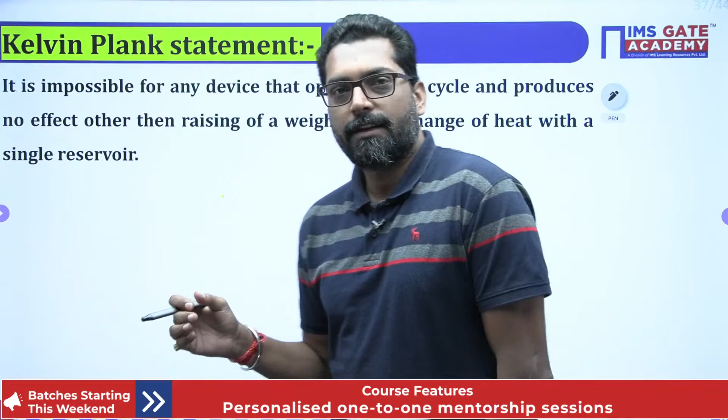Today we will discuss continuity of the second law of thermodynamics. We already studied the physical significance of the second law of thermodynamics, that it gives a qualitative parameter, not a quantitative one. It tells whether the process is feasible or not, whether the process is actually happening. If heat transfers into work or work transfers into heat, that means the process is happening.

That's why this diagram is very important. When the first law is switched on, the process is happening. But whether that process will actually occur or not, that is given by the second law.

This is very important. The conservation of energy says that energy will transfer, work is transferred into heat, heat is transferred into work. It is not necessary that it happens fully or partially, but it will transfer. When this transfer occurs during the process, that means the process is happening. But whether the actual process is happening or not, that deals with the second law of thermodynamics.

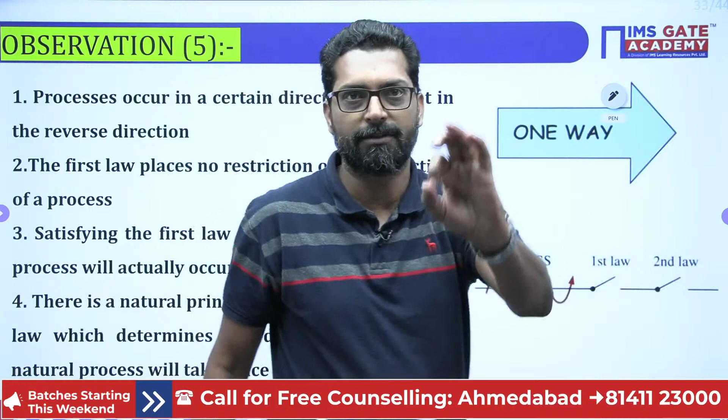This discussion is already covered. Heat engine already covered, thermal energy reservoir already covered, and its physical consequence. Now we will consider the two statements of thermodynamics.

The first is the Kelvin-Planck statement. This is very important, because first we read it as it is. What the Kelvin statement says, we take as it is. It uses somewhat advanced language to describe what is possible and what is impossible. It says that we cannot do something like that, meaning it is impossible.

As engineers, we want the possible. It says we cannot construct a device, meaning it is impossible for any device that operates on a cycle. If you want a device to continuously operate, it must have a cycle.

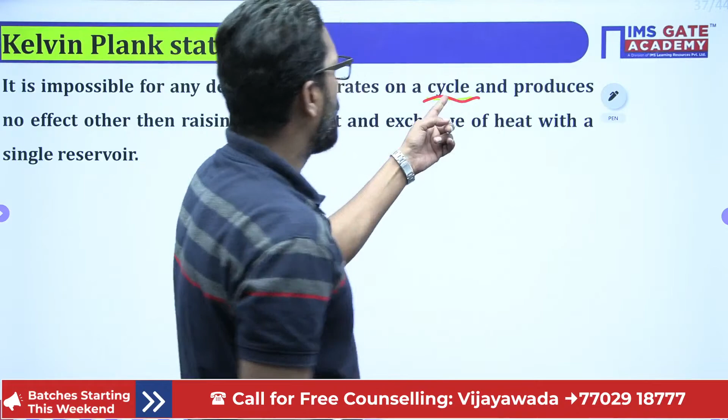We are not talking about operating on a process; we are talking about operating on a cycle. If there is any engine or device that continuously operates, it must be operating on a cycle. If you want to construct such a cycle, that cycle is impossible under a certain condition: the condition is that it produces no effect other than the raising of a weight, that means work, while exchanging heat with a single reservoir.

That means you cannot construct a device which takes heat and converts it totally into work without rejecting any energy, without loss of any energy, to another reservoir. This statement says that if you construct such a device, it must have a minimum of two thermal reservoirs.

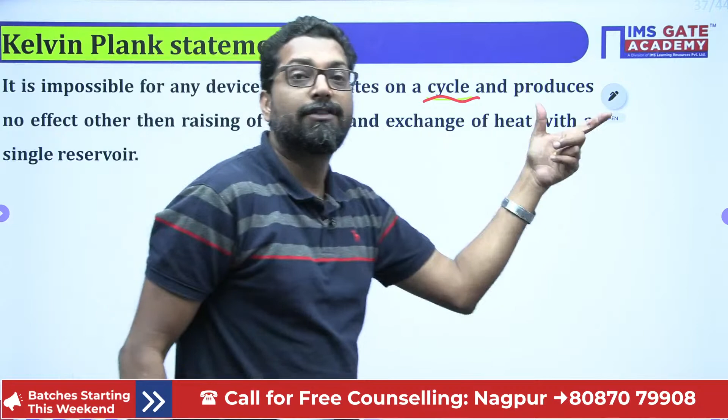That gives information about the number of reservoirs needed to operate a device on a cycle. So what is impossible? It is impossible to design a device operating on a cycle, with no effect other than producing net work, by taking heat from a reservoir. It says this is not possible, it is impossible.

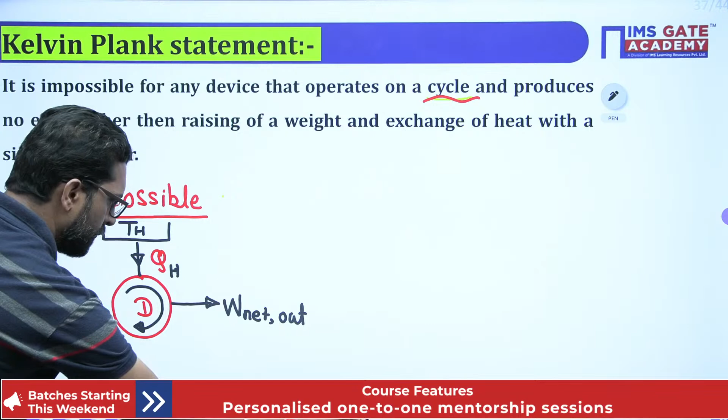If there is a rejection, if you draw that dotted line, no problem. That means if QL, the heat rejected, is zero, it is impossible. If QL is zero, you cannot construct such a cycle or device. It says it is impossible to convert total heat into work. It is not possible to convert all heat into work; it is possible only if you lose something. That is what is possible.

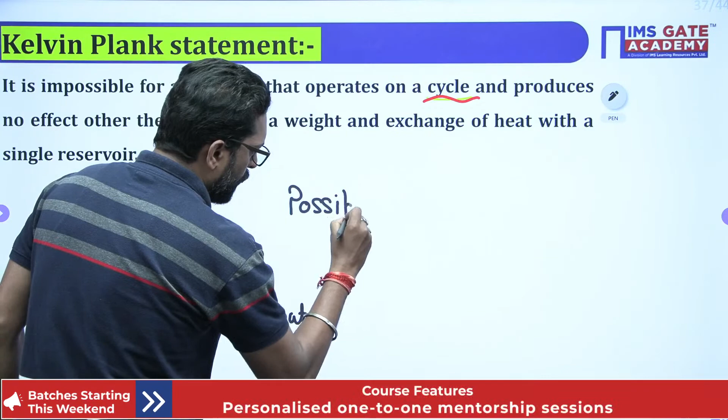What is the possibility? The possibility is that you construct a device which is operating on a cycle, which produces a net work by taking heat from a large thermal reservoir, and the remaining energy will dump into a low thermal reservoir. That will be possible. That means if you design this, it is called a heat engine. That means the Kelvin-Planck statement gives the information of the heat engine, a work producing device.

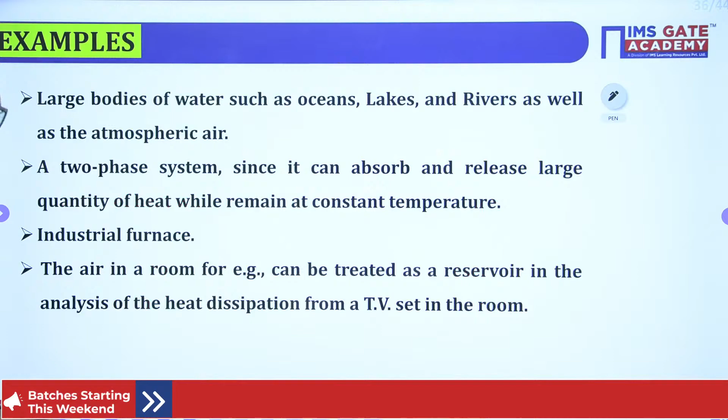This gives the work producing device. Yes Atul, that was already covered in the previous lecture, but I will cover it again in the starting of the class since it is a general statement. What is the general statement? This is very important, Atul. Okay, no problem, I am happy to revise again. See my dear, the general statement is of the second law.

It gives that all the spontaneous process, what is meant by spontaneous? Natural process. All the spontaneous processes have a certain rhythm, that means a certain direction. That means the second law gives the directional constraint.

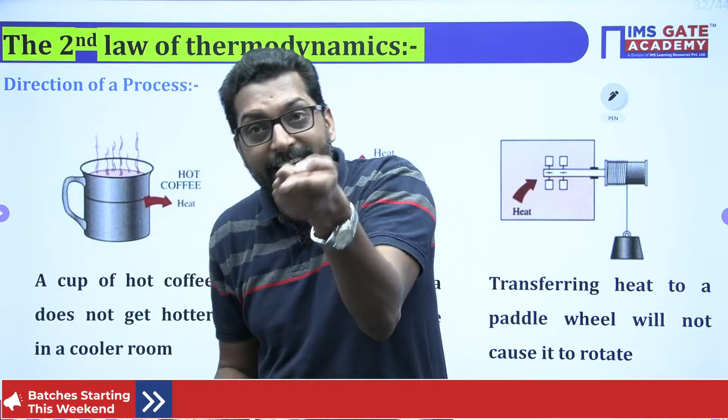That means there are infinite number of processes, many processes to go from one point to another point. But out of that, according to the second law, only one process is feasible, or helpful for me, or efficient, and that will be predicted by the second law. That means out of all the processes, there is one process which is more efficient, that we will follow. That gives the direction of the process to be followed.

This is the very simple example so you can understand, but there may be other examples which you cannot directly predict. So you can predict using the property known as entropy. So if you want to find the directional feasibility or not, that will be predicted by the property known as entropy.

So with the help of entropy, we can say whether the process is possible or not. So your question was what is the general statement? The general statement is that this gives the directional constraint, it gives the direction. Yes, energy will conserve, energy will convert from one form to another, but which conversion is efficient, that is given by the second law. Okay, I hope it is clear. Now next.

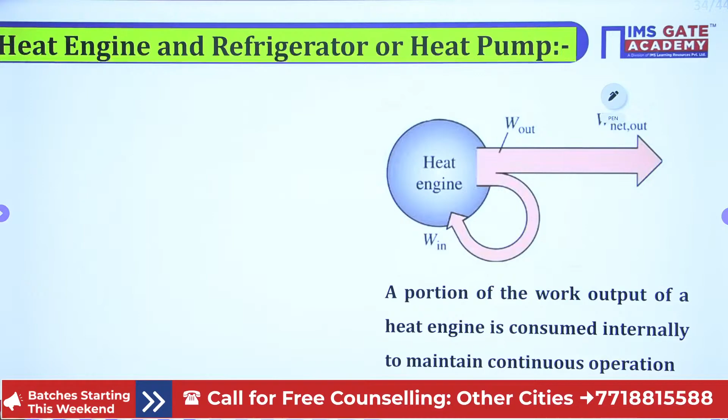So this is the efficiency. Now if you find the efficiency of this heat engine, we know that it is 1 minus QL by QH, already defined. This is the efficiency of the heat engine, and this equation holds for any process, mind it. It is not necessary that this is reversible or irreversible, this equation is applicable for any process.

Okay, so this is the efficiency of heat engine. This precisely states the Kelvin-Planck statement. Now the second statement, what is the other thing in that? So these are the Kelvin-Planck statement, and now sometimes I will give you some extra information for that. This is called, in this case, it is possible.

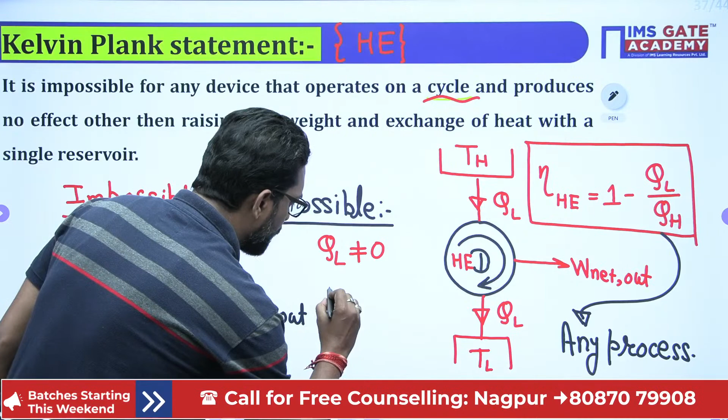What is possible? That means QL is not 0, QL must have some value. If QL must have some value, then efficiency of the heat engine will be less than 100%. Is it true? Less than 100%. Yes, if this is happening, then this will be a quantity which is a fraction. That means QL by QH is always less than 1, yes or not? QL by QH is less than 1, so this is also less than 1, so efficiency of heat engine will be less than 100%.

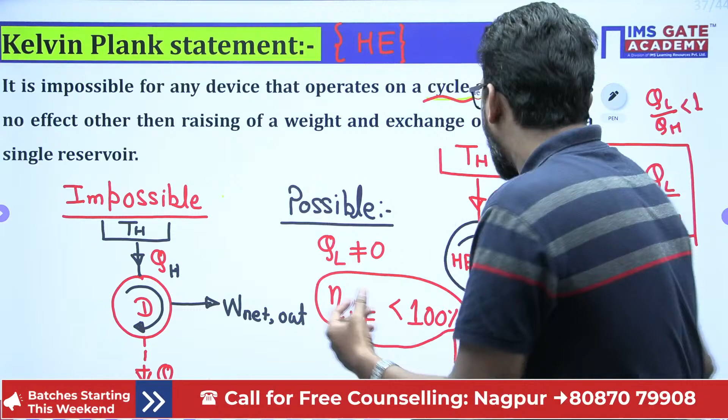Okay, less than 100%. Now if we operate a power plant, this heat engine is a work producing device, and this will also be modeled as a power plant. So in the power plant, there are two temperature limits: one is the source, and this is called the sink. Source is the furnace and sink is the environment. I will write it down here, no problem. Why? Because it gives the feel. So if you think about the heat engine, let's suppose this is our heat engine.

Okay, operating on a cycle. What cycle? We don't know. Operating on a cycle, and we take this, this is our system. Heat engine is our system. This is our system, mind it. Now it will take a heat

from a high temperature reservoir QH, produce a net output, produce a net work, and dump the remaining energy to the low temperature reservoir TL. Mind it beta, this is TH.

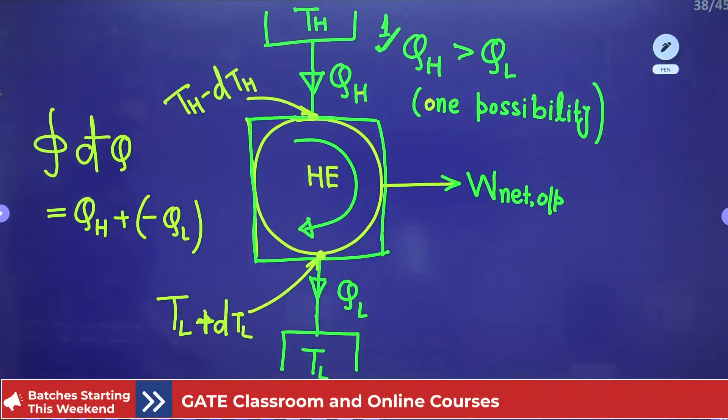My dear, each and every line has an importance. Okay, that means this one possibility is greater than 0. That means cyclic integration of dq is greater than 0 for a work producing device. It is clear. And what is happening, another thing we'll discuss, but right now this is clear. Cyclic integration of dq is greater than 0 for work producing device, work producing device.

Now, what we know is first law of thermodynamics, cyclic integration of dq is equal to cyclic integration of dw. We know that, that means dq is greater than 0, this is also greater than 0, yes this is also greater than 0. That means QH minus QL is equal to W net. This is according to first law of thermodynamics.

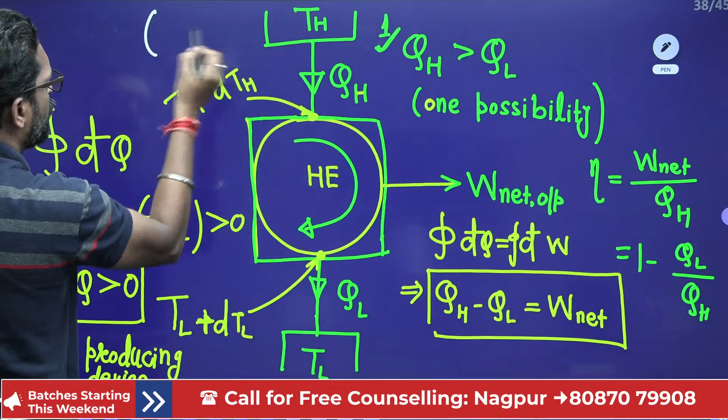Right, if we think about the power plant, this high temperature reservoir, my dear, this high temperature reservoir is called, this is your source. This is source temperature, and in the source temperature, if you think about the power plant, that means steam turbine, Rankine cycle we'll discuss later on, this is furnace. This portion is furnace, and this is QL. This is your sink, and this will act as an environment, a surrounding, right? Environment, okay? So this precisely we will use the concept of power plant in the power plant, okay?

When we enter into the entropy chapter or your Carnot cycle, we will discuss now today's Carnot cycle. Then we define the cycle is reversible, and with the reversible, internally, externally, all the things we will discuss, no problem. So this is the things, okay? This is clear.

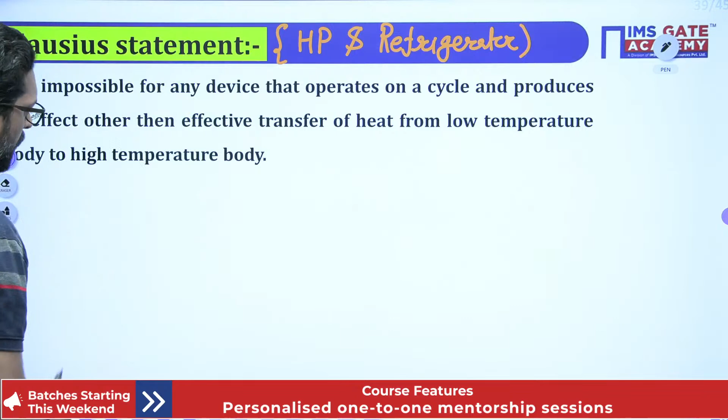Now, Clausius statement. What is the Clausius statement, my dear? Clausius statement gives that, what is that? It gives the information about heat pump and refrigerator. It gives the concept of heat pump and refrigerator. What does it say? See beta, I give you one thing. What is that? See, if you want, this is a high temperature thermal reservoir.

See, first see the motivation. This is a low temperature thermal reservoir. Okay. Now, if you connect with the diathermic wall, heat must flow from high temperature reservoir to low temperature reservoir. There is no problem, that means this is a spontaneous process. It will be there, that is called a spontaneous process. That means if you attach this high temperature and this low temperature and attach a metallic wall, you can say that the heat will flow. So this is a spontaneous process, a natural process.

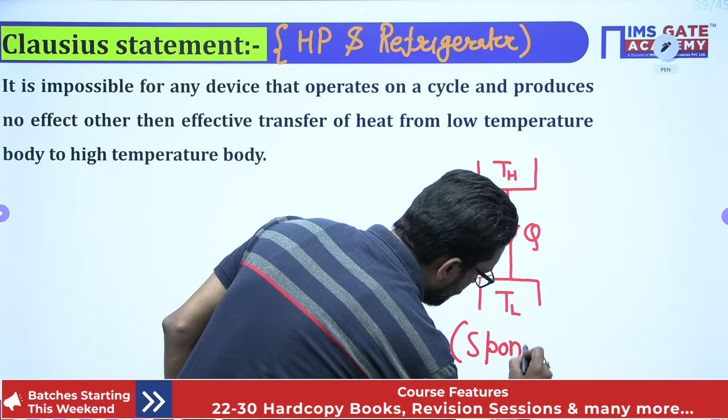Spontaneous process: it will occur. Now, Clausius thought about what happens if we take the same thermal energy reservoirs, TL and TH, and we want heat to transfer from low temperature to high temperature. Not possible.

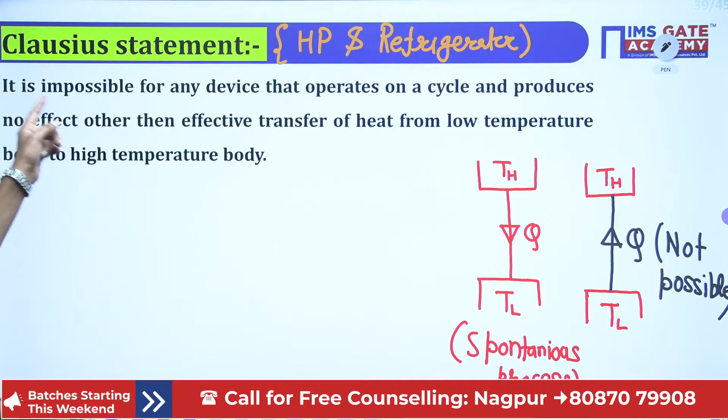This gives the Clausius statement: it is impossible for any device that operates on a cycle and produces no effect other than the transfer of heat from a low temperature body to a high temperature body. It is impossible.

That means if you want to transfer heat from a low temperature reservoir to a high temperature reservoir continuously in a cycle, you must have an external agency. Without external agency, you cannot achieve it. Same thing with water: if you take water from a low reservoir to a high reservoir, you must have a pump. Without pumping, without external work, you cannot transfer water from low reservoir to high reservoir.

Here it is pumping of heat, and in that case pumping of water. We want the heat to flow, and at that point we want the water to flow. So if water flows from low reservoir to high reservoir, it is not a spontaneous process. There must be some external agency known as a pump. Same in the case of heat flowing from a low reservoir to a high thermal reservoir, there must be an external agency. So what we will do is construct a device.

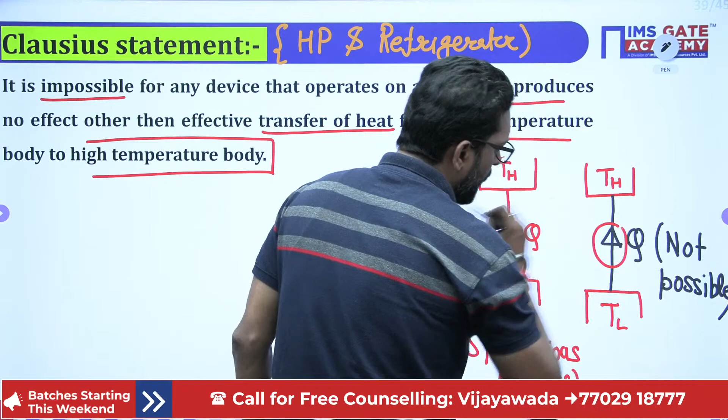Here, we construct a device which operates on a cycle. So this is impossible. What is possible?

What is possible is that if this is your low temperature reservoir and this is your high temperature reservoir, and you want to transfer heat from the low temperature reservoir to the high temperature reservoir, you construct a device operating in a cycle in which we have to give external energy. That means we have external work input. That will assure you it will transfer energy from the low reservoir to the high reservoir. This is your QL and this is your QH.

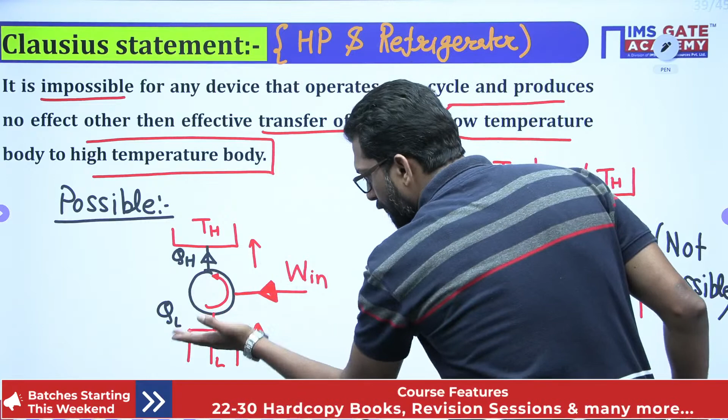That cycle is possible to pump the heat from a low reservoir to a high reservoir, continuously working. But the problem is that if we don't have this external work, if this is zero, it is impossible.

Now, if we want to maintain the lower temperature, in that sense this device is a refrigerator. If we want to maintain the high temperature, that is a heat pump. So what is the observation here?

If you maintain... that means work input device, refrigerator or heat pump. Work input in a cycle, okay?

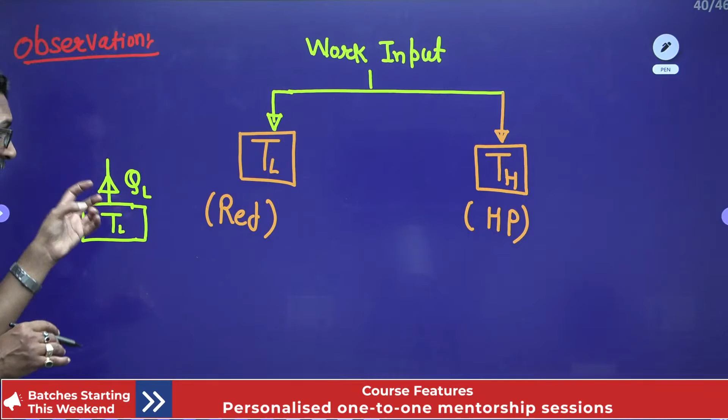That means you constantly extract the heat to maintain the low temperature reservoir; that is called the refrigeration effect.

And what is this one? Sometimes in layman's language we can say this is also what we want. So, this is a refrigeration effect, and this is a refrigerator.

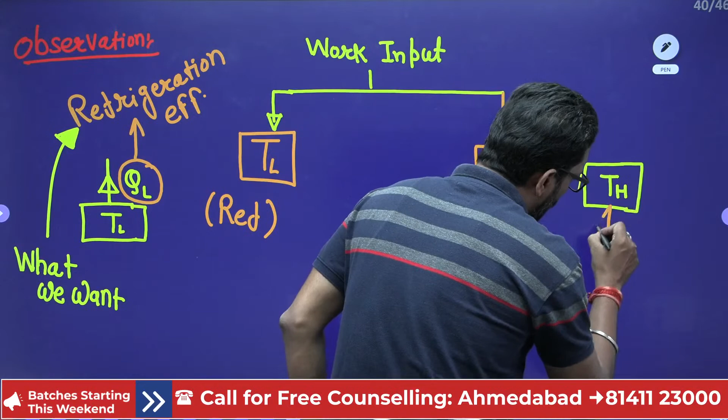If we maintain the high temperature, that means if this is your high temperature, and you maintain this one, continuously you give heat into this. If you maintain a high temperature, continuously you dump the heat into the high temperature reservoir. That is QL.

So this QL is a pumping effect. This is your refrigeration effect, and this is your pumping effect.

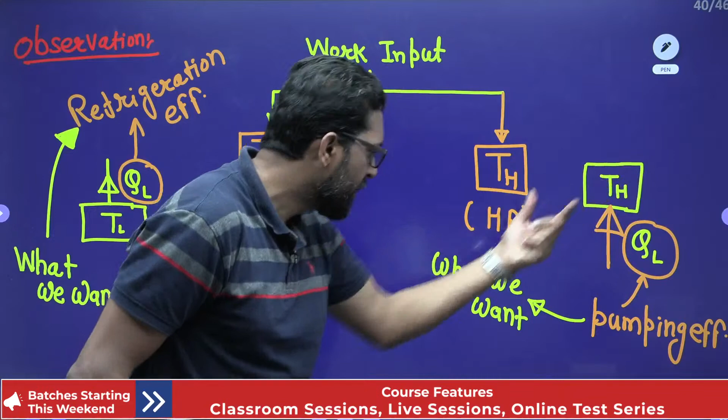Pumping effect. That pumping effect is also sometimes called what we want. So beta, in the work input device, there are two types: refrigeration and heat pump. In refrigeration, we want the low temperature, and in the heat pump, we want the high temperature to maintain. To maintain the high temperature, if you supply heat to the system, that is called pumping effect. If you maintain the low temperature, you continuously extract heat, that is called refrigeration effect. That means in both cases, we have to define coefficient of performance, COP.

We define the performance. What is the performance? There is a difference between efficiency and performance. Efficiency is net output by input. Performance is what we want and what we pay for it. This is very important. So performance is what we want, divided by what we pay for it.

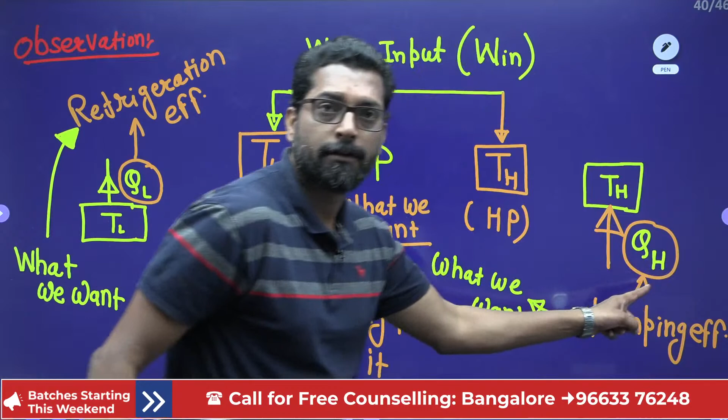What we want, beta? In the case of refrigeration effect, what we want is QL, and what we pay for it is work in. In the heat pump, what we want is QH, not QL, and what we pay for it is W in. So accordingly, you can define the coefficient of performance.

We already covered this thing. This is your Clausius observation, observed by Clausius. My dear, this is a spontaneous process. You cannot reverse it back spontaneously without installation of a device which extracts energy from an external source. That will be a second law. That means the second law says it is not possible. This is possible naturally, there is no science against it naturally. But if you want the direction reversed, whether it is possible or not, that gives the second law. That means this gives the direction in which it is possible.

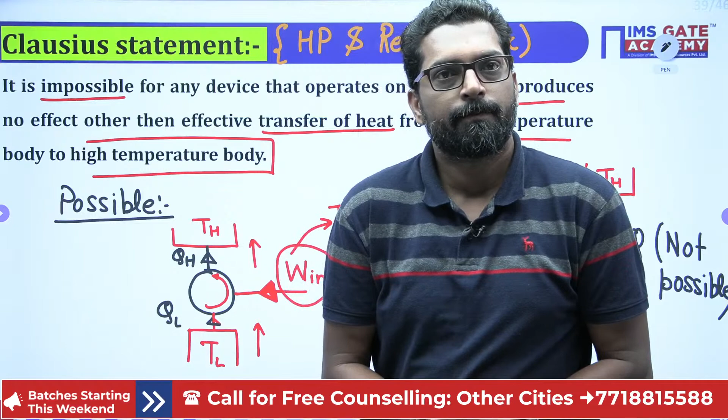So we have to design two devices: one is power producing, the other is power absorbing. According to the Clausius statement, we design the power absorbing device, that means power input cycle, and for the Kelvin-Planck statement, we design the power output cycle. So there are two types of cycle: power output cycle and power input cycle. Power output cycle known as heat engine, power input cycle known as refrigeration or heat pump.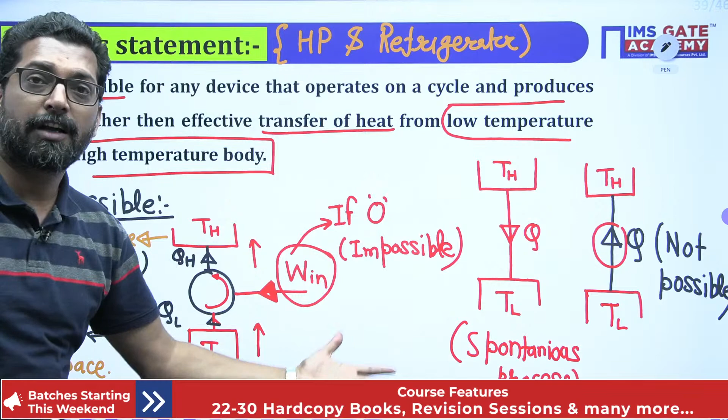And this is called sink, low temperature, and that is sometimes called cold space. So the terminology is very clear. Why? Because we study the importance of this to implement this concept into a power plant. That is very important. So these terms are very important: warm environment, cold space, environment, furnace, like that. Furnace acts as a source in the case of heat engine. Warm environment acts as a source in the case of refrigerator or heat pump.

Okay, now if we apply the cyclic integration, this is very important. See, if we apply the cyclic integration of dq for the power producing device, there must be greater than 0. This is very important, I am telling you. But if we installed a refrigerator or heat pump, what is delta Q? See this, my dear.

That means if you design a device, not red color, what is this? This is okay, device. Let's suppose this is a refrigerator or heat pump, operating on a cycle, and let's suppose this is our system. This system will continuously work on a cycle. The Clausius statement says the possibility is that when you take energy, we are able to extract heat from a low energy reservoir and dump the remaining energy to the high thermal reservoir. That is okay.

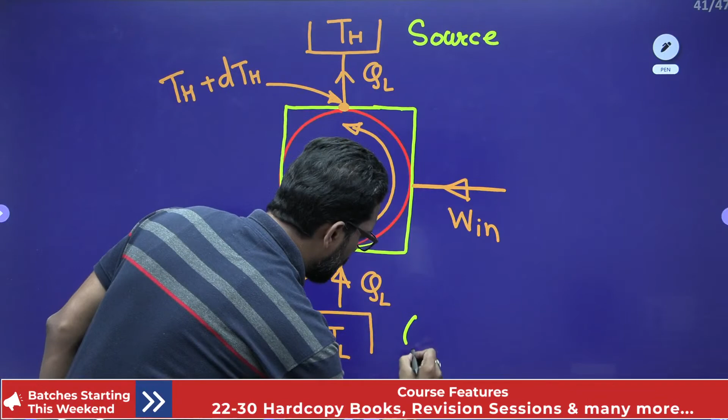Now, this is very important. This is called source, high temperature always called source. This is low temperature always called sink. So in the power producing case, what is sink called? Right now sink is called warm environment. Source is called cold space. Sorry, my dear, this is called cold space.

Cold space, and this is called warm environment. Now, from low temperature, this is not direct heat transfer.

What is that? What is Atul saying? Yes, this is QH. Now what is your question? I don't understand - one second. Atul says that this is not direct heat transfer. Which one, Atul? Just this one, I think. You're telling this one, please?

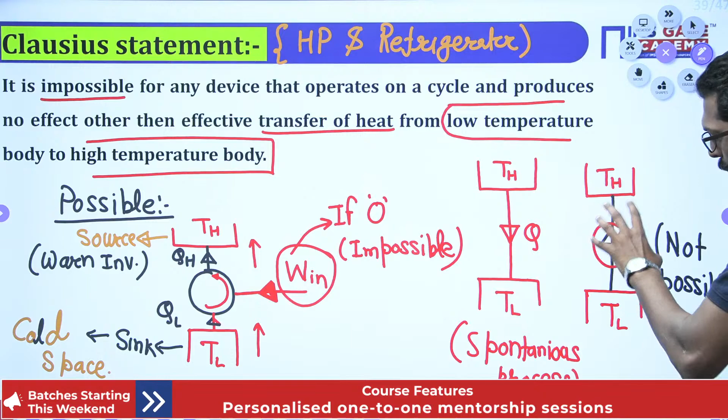Yes. From low temperature reservoir to high temperature, we cannot directly transfer heat. We have to install a cycle. Very important - you cannot. We have to install a device. Which type of device? A power absorbing device, like that.

See, produce no effect other than the effective transfer of heat from low temperature to high temperature. That means if any effect is taken from the outside to pump the heat from lower temperature to high temperature, it is not possible.

So what is possible? You construct a device - okay, I think you are asking like that. I think is there any confusion in this context? Other things you want to ask, please reply in the chat box. Okay, it is clear, then okay, otherwise you can ask me. Repeatedly, no problem.

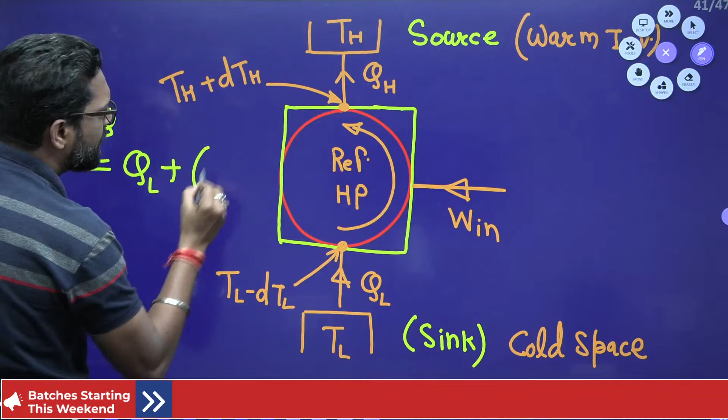No problem. So this is our refrigerator source and this is our work absorbing device. Now if you find the cyclic integration, what is the cycle integration of dq in this case? The cycle integration, we know that this is QL positive plus - why? Because this is summation - minus, it is out from this system, minus QH.

See the beauty. It is one possibility that QH is always greater than QL, yes or not? So QH always greater than QL, that means the possibility is that this may be less than 0. Very important - this may be less than 0. Other equality or inequality will also hold, but that inequality we will search in the next session.

Okay, next class, what we will do then - accordingly the cycle is reversible or irreversible. So cyclic integration of dq is less than 0 for a work absorbing device. That means in the Kelvin-Planck statement, cyclic integration of dq is greater than 0. In the Clausius statement, cyclic integration of dq is less than 0. This is sure.

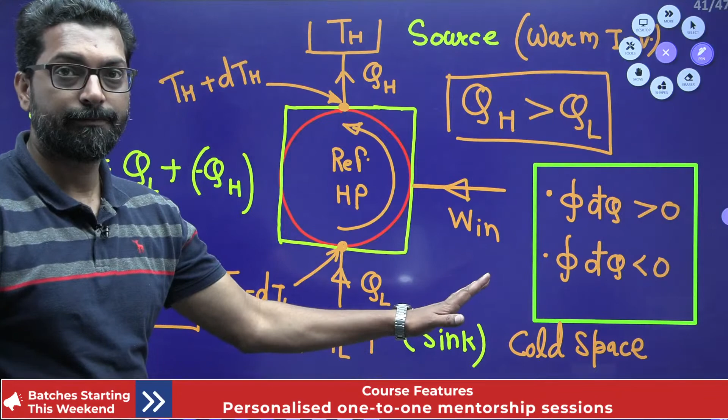This is sure, so we have to think like that. If you take one observation, what is that? Cyclic integration of dq is greater than 0, cyclic integration of dq is less than 0, cyclic integration of dq is greater than 0 - this greater than 0 is work producing. That means this is work producing, and this is your work input device. This is clear, okay, so this is very clear.

Why are we discussing this thing? Because in this manner you cannot teach anywhere - I am damn sure that in this manner you cannot teach anywhere in the sense of second law of thermodynamics. This gives the build up of the quantity dq by T, and that quantity is a very important quantity. Why? Because this quantity dq by T is related to the property, and what property we will discuss in the upcoming classes.

So be patient. So this is your work absorbing device - work absorbing device has cyclic integration of dq less than 0, work producing has cyclic integration of dq greater than 0. Okay, no problem at all. Now the next one is very important, very important. What is that? What is the context? Yes, this is very important, I'm telling you.

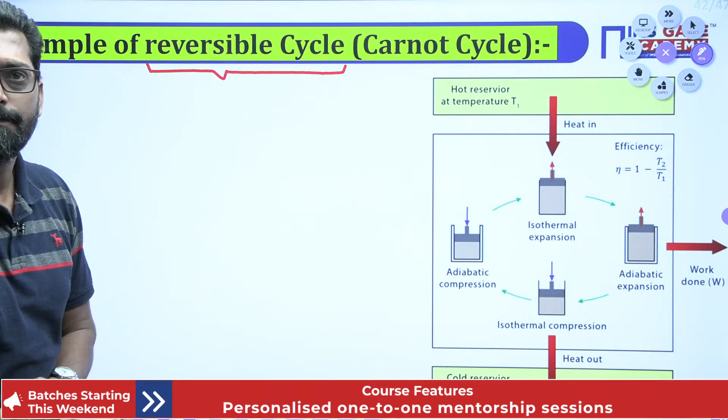See, from here, my dear, there is one punch - what is that? There is one term, reversible cycle. If we think about the reversible cycle, the first thing that comes into mind is, what is the criteria for the reversible cycle? Yes or not? What is the criteria for the reversible cycle? See, reversible - the word reversible, that means total reversible.

Total reversible of the system - what is the total reversible? We already discussed the total reversible is the combination of internal reversible plus external reversible, right?

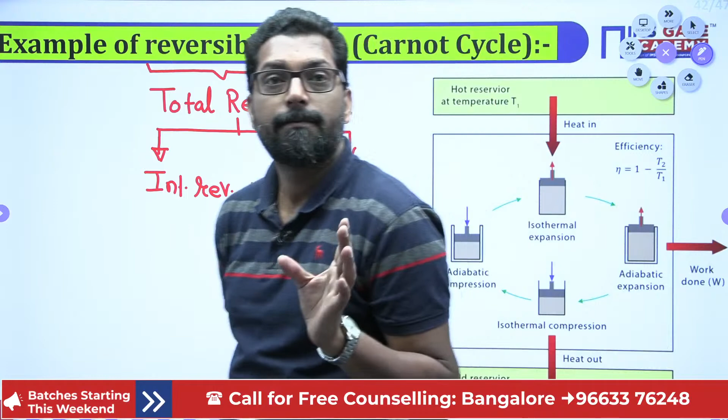Now the important thing is how to make the system internally reversible and how to make the system externally reversible. If you make the system internal reversible, this is very important - there must be a quasi-static process. Must be a quasi-static process.

That means you can say sir, there is no any dissipative effect. This is very important. That means there is no dissipative effect, meaning we cannot change the property in terms of temperature due to viscosity or friction. That means friction and viscosity are negligible.

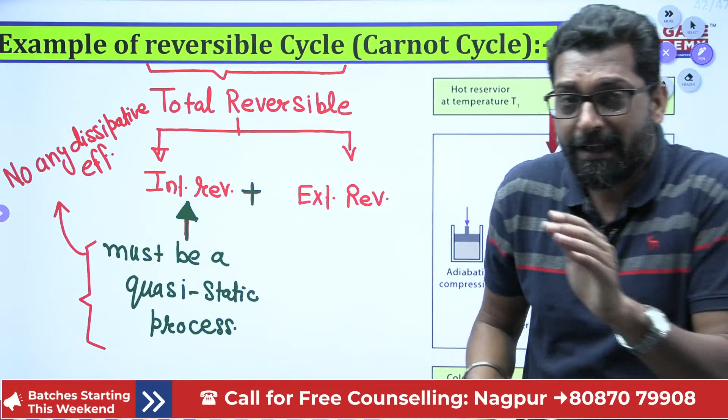See, internal reversible is due to the dissipative effect. This is very important - internal irreversibility. If you say internal irreversibility, that means if you want internal reversible, you disregard the dissipative effect. That means when the piston cylinder, if you assume the piston is moving inside the cylinder, you must have no friction between the cylinder wall and the piston.

We can consider there is no friction when the process is very slow. When the process is very slow, that means each and every point during the process has a locus. That is called no dissipative effect. So must be a quasi-static process.

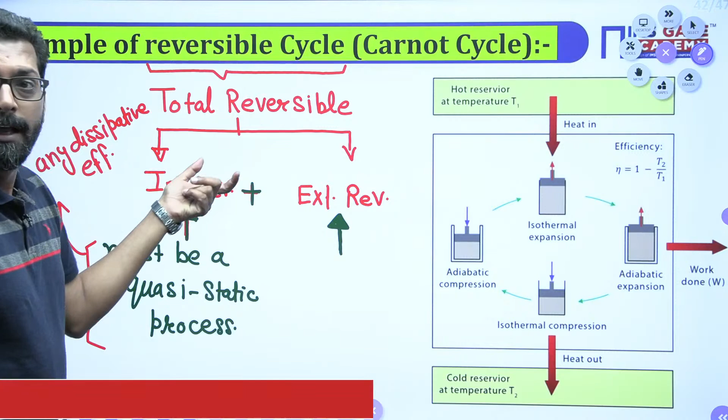Now what is the external reversible? This is very important - how to make external reversible? Internal is due to dissipation, you can say as dissipation; external as heat transfer.

So external reversible or irreversible, you check the heat transfer through which range of temperature. Internal reversible or irreversible, you check how much the process will have a dissipative effect - it is more dissipative or very minimum dissipative. If there is a very minimum dissipative effect, it may be modeled as internal reversible.

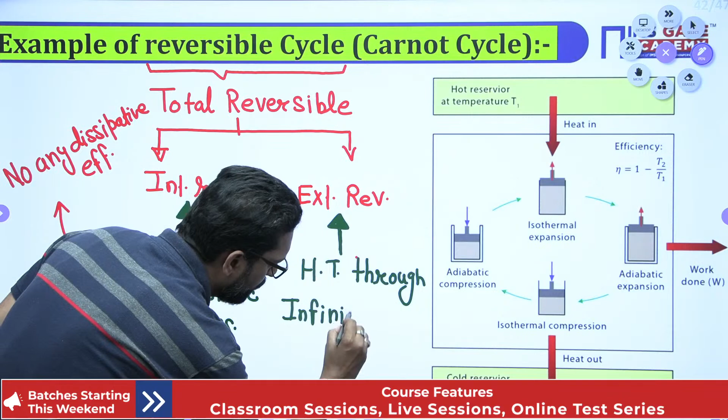That means externally reversible means heat transfer through an infinitely small temperature difference. That means in this sense, if you want external reversible, delta T tends to 0. This is very important - delta T tends to 0.

That means heat will transfer from the surrounding to the system. The temperature difference is very minimum. If you do like that, then you can say this is the external reversible. Number first. Now, if we want,

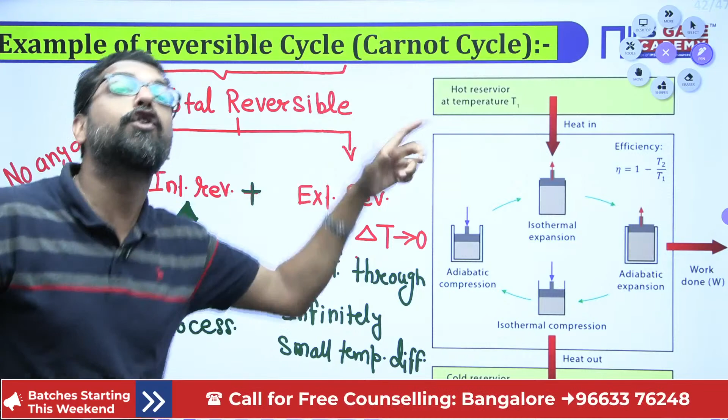so in the Carnot cycle, there is a cycle known as Carnot cycle. What is the major perspective of the Carnot cycle? It is total reversible - that means internally it is a quasi-static process, no dissipative effect, and also heat transfer across an infinitely small temperature difference. This is clear.

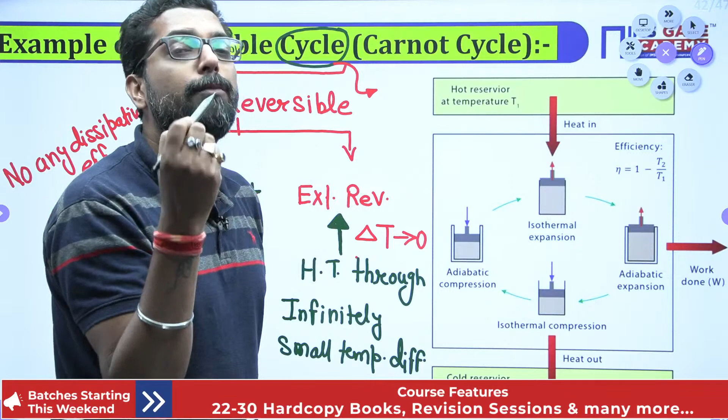Total reversible. Now, so there is a cycle, and this is your cycle. This cycle has many processes, more than 2 processes - minimum 2 process. So in the Carnot cycle, there are 4 processes. In the Carnot cycle, there is a 4 process. What is that? We'll discuss.

See, first there are 4 diagrams here. The first one, we discuss the first one. This is, first is the adiabatic compression. My dear, we'll start the process 1 to 2. This is very important, okay?

Process 1 to 2 - what is the process 1 to 2? There is a compression. What is that? Compression means you compress the gas in a closed system. This is the closed system, beta. Okay, you compress the gas, so for a closed system, there must be a piston cylinder arrangement. In that piston cylinder arrangement, there is a gas, a fluid, which has to be compressed, and the compression you want is adiabatic.

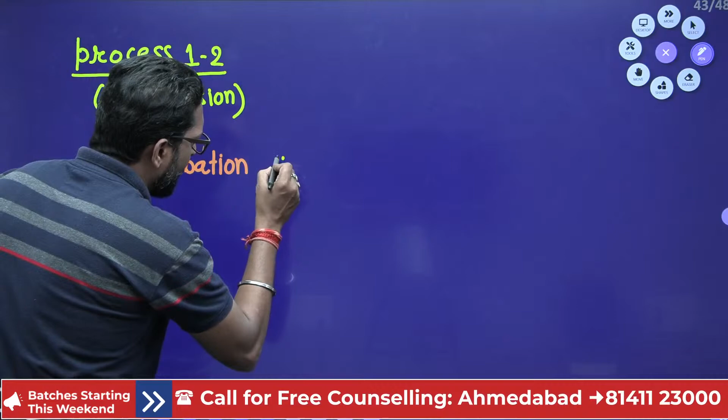That means heat transfer during process 1 to 2 is zero. This is the adiabatic process: 1 is the start of compression, 2 is the finish of compression. During this, there is an adiabatic compression, number one.

During compression or expansion, we say the cycle is reversible - totally reversible, internally and externally. That means you compress reversible adiabatic - reversible plus adiabatic. What is the nature of reversible plus adiabatic? This is a very important nature.

We'll discuss this in the next session.

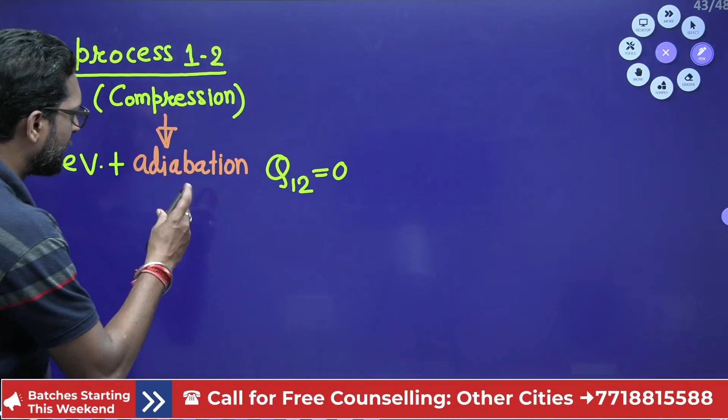But we know in the adiabatic case there must not be any chance of heat transfer. That means you have to design a cylinder such that - okay, this is our piston, and this is our system. Now you design a cylinder in such a way that it is completely insulated, meaning there is no chance of heat transfer.

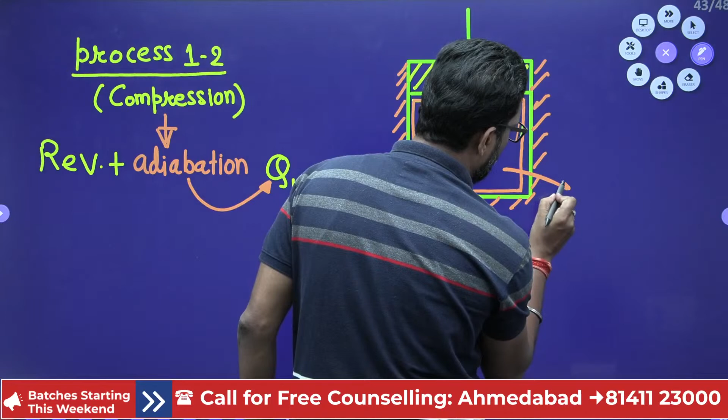Now you compress it. If you compress it, what happens? There is no transfer of heat, so heat transfer 1 to 2 is zero. That means if you compress it, its temperature will continuously increase.

So you compress from point 1 to point 2. That means you must have work input - a displacement of the boundary work. The piston wants to displace the system boundary. The piston acts as the surrounding, so from the surrounding, work is done on the system.

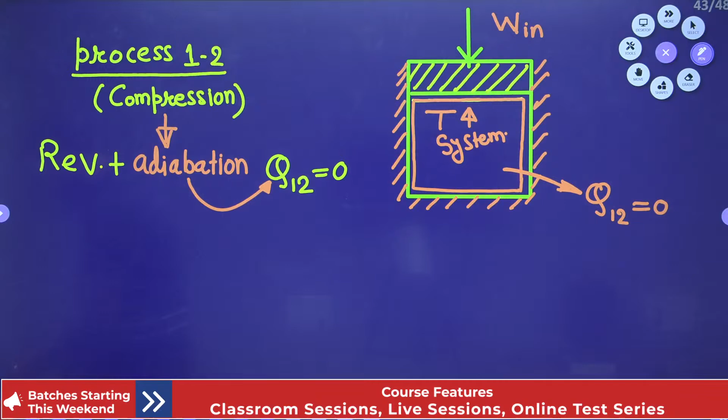So this is your adiabatic compression. In this case, the piston will move down up to point 2, let's suppose. So this is adiabatic compression. Now what will be done? Slow compression.

This compression is very slow - slow compression, very slowly. Why? Because we want it to be internally reversible as well as externally reversible. There is no chance of external irreversibility because there is no heat transfer, but it is internally reversible, so it is a slow compression, so we want internal reversibility.

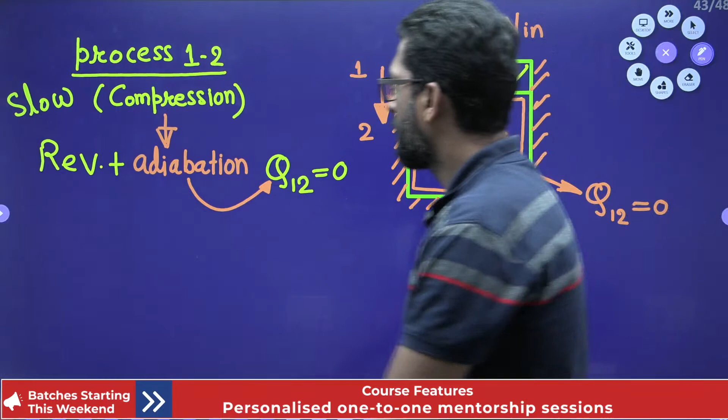So we want a very slow compression, reaching point 2. In this process, temperature will increase because there is no chance of heat transfer. So this is step number 1, process 1 to 2.

Now, this is the first process. Second process - what is the second process? Process 2 to 3. What is process 2 to 3?

If we compress it, the system temperature will increase, meaning it stores more energy compared to before. At state point 2, the energy of the system is more than at point 1, because you add work to the system, which ultimately increases the energy.

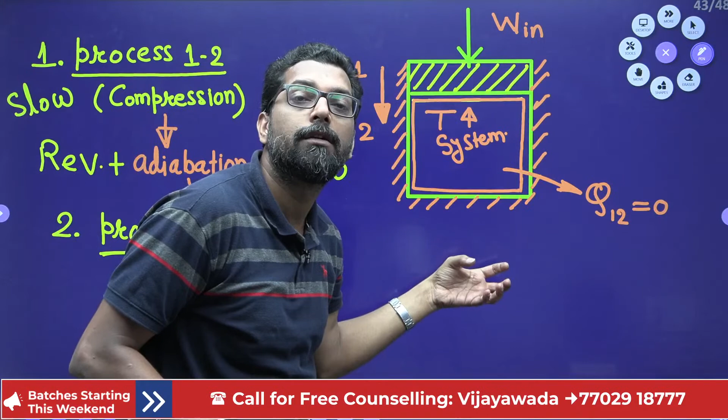Now in the second step, you remove all the insulation and allow heat to transfer from the surrounding to the system through an infinitely small temperature difference, so that externally it is reversible. This is the compression - first is the compression, then slow compression with no heat transfer.

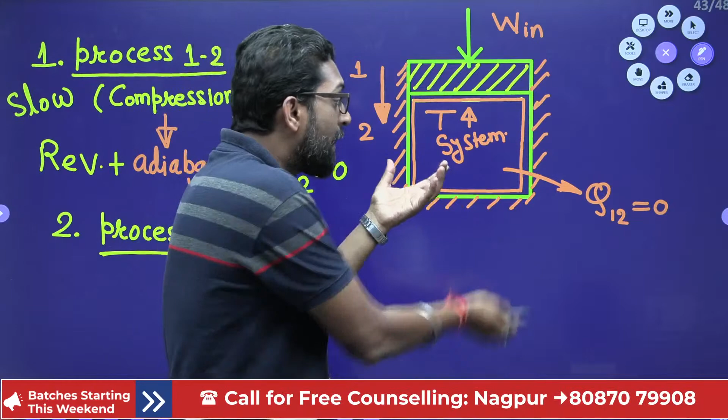Now process 2 to 3 is isothermal heat addition. Now we add heat, because when we compress, temperature increases. Add the heat - if you think about the engine, you supply fuel, so the fuel burns and we add heat. So in this process 2 to 3, there is heat addition.

Heat addition. Now this is at point 2. Now when the heat is added, the system will expand. That means from 2 to 3, heat will add.

Mind that the heat addition is a reversible isothermal process. That means you add heat as a reversible isothermal process.

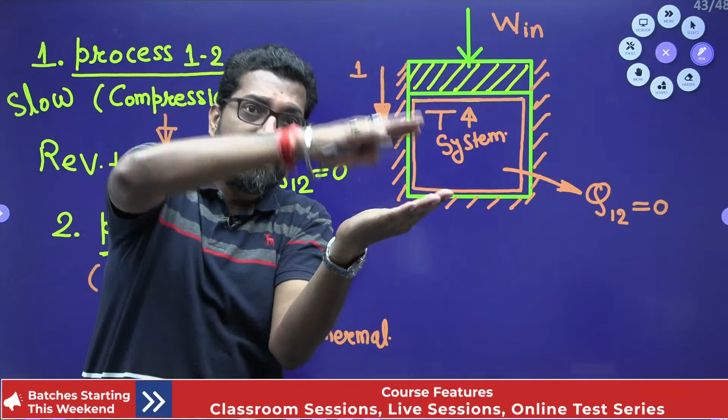That means you cannot increase its temperature. See, when there is a system and we add heat to the system, temperature will increase. But you don't want temperature to increase, so immediately you expand the system.

So its temperature is maintained the same. Again heat is supplied, again the system wants to increase its temperature, again you expand. So expansion is like quasi-static and heat addition is like an infinitely small temperature difference. So it is totally reversible.

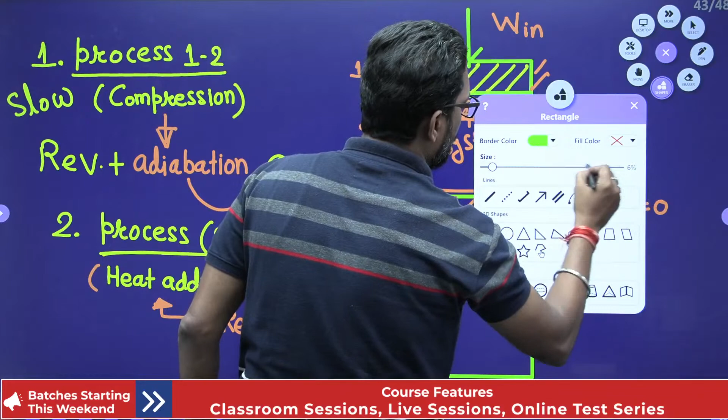What is that? You want that this is position number 2 of the piston, yes? This is position 2 of the piston, okay? This is at position 2.

Now, here, you remove all the insulation, so this is the temperature T at any time at point 2. Now, this is your high temperature, mind it. This is a very high temperature TH, let's suppose.

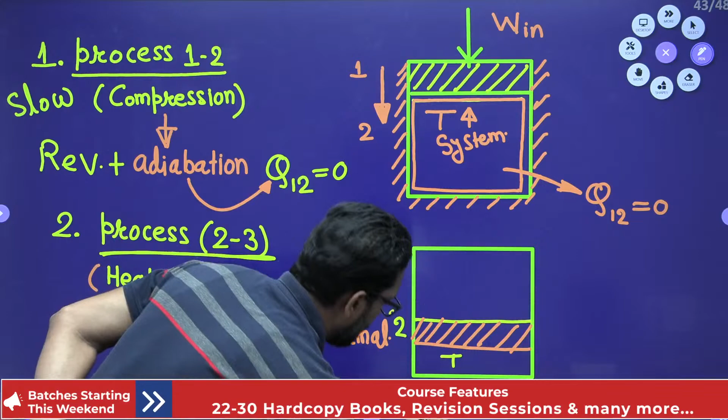So, what is that? It is visible or not? No, it is not visible, okay? No problem at all.

Next page. This process continues with that. This is your cylinder, and this is your piston, okay? At this point is position 2.

Now, you take a thermal reservoir which has a high temperature TH. You transfer heat across this system boundary, from the high temperature reservoir to a low temperature side, which is TH minus dTH, across which the heat will transfer. So the system will expand and reach this point.

That means there is an expansion, the system will expand. Expansion from 2 to 3, and during that, temperature is constant at TH. Let's suppose dTH tends to 0, so it is reversible, and TH is constant.

That means while you are transferring heat, the temperature wants to increase, but accordingly you push the piston upside, so the temperature is maintained constant. Again you supply heat, temperature again wants to increase, you again push the piston up, so that the temperature throughout remains constant. So this 2 to 3 process is nothing but a reversible isothermal process.

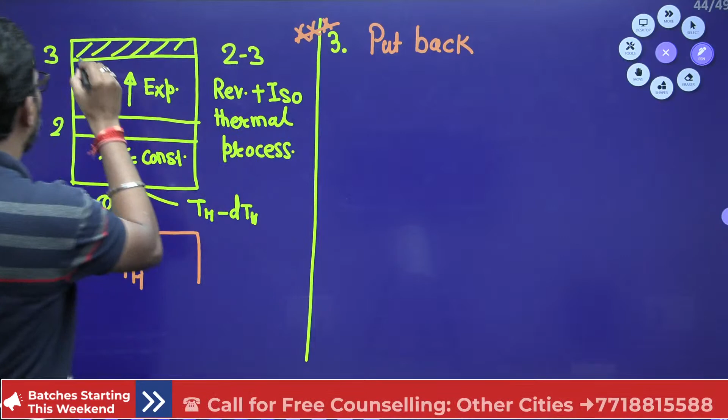This is very important, this third line. Put back. That means, this is your cylinder, this is our piston. So this is point 3, okay?

So this is expansion, and expansion at a constant temperature. Now put back the insulation.

This is very important. What is happening in this situation? Put back the insulation again and keep on expansion. Keep on expansion, that means expansion is going on.

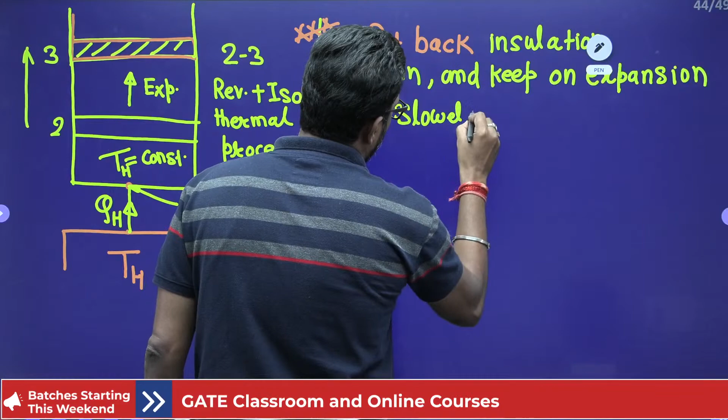Keep on expansion slowly. So this is, reversible. Slowly it is reversible, and put back insulation, that means adiabatic.

In this condition, what is happening: this is our cylinder, this is at point 3 of a piston, it will move slowly to this point. This is 4, so this is also expansion.

Now from 2 to 3, then 3 to 4: during 3 to 4, the piston will reach from 3 to 4. In that situation, there is also slow expansion, but during 3 to 4, there must be insulation. That means during 3 to 4, you insulate everything, and automatically the piston will rise to the final position 4. So in this situation, 3 to 4, we insulate, that is, put insulation.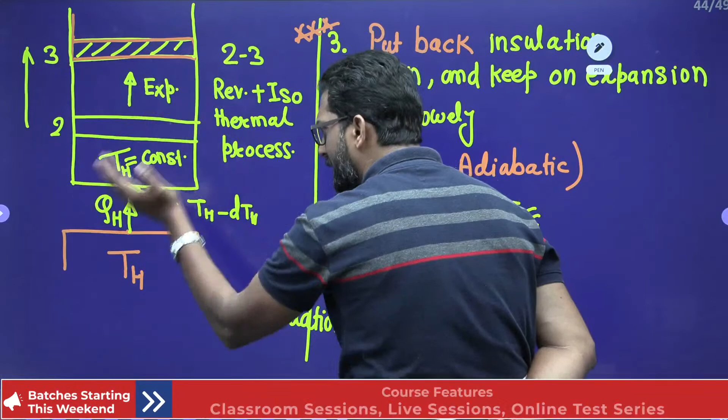So beta, there are two natures of expansion: one at constant temperature, and one adiabatic. What is adiabatic expansion? You store the energy, meaning you supply energy continuously, then you just move the piston. Once movement starts, you disregard heat transfer, put the insulation on, and it moves automatically. That means process 3 to 4 is very, very important.

This process 3 to 4 gives the power stroke. This is the actual power output. In this process, the power will come out, power stroke. So 3 to 4 is the power stroke in which we cannot do anything. The piston automatically moves and gives output. Why? Because as the piston moves, the boundary displaces, so it outputs work. That is called power stroke.

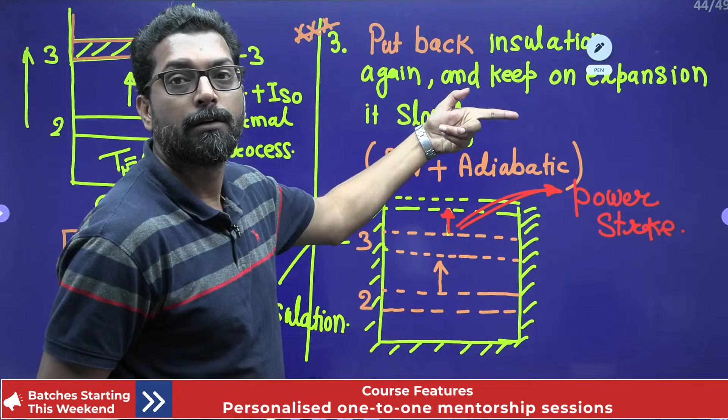So there are two expansions. First is isothermal expansion. Why do we want isothermal expansion? Because we start the piston to move at constant temperature. At constant temperature you add heat, and once you add heat, you put back the insulation on the piston, so that the heat added requires that energy to push the piston to position 4. In the case of 3 to 4, you cannot supply externally. So this is adiabatic expansion. So one is isothermal expansion, the other is adiabatic expansion.

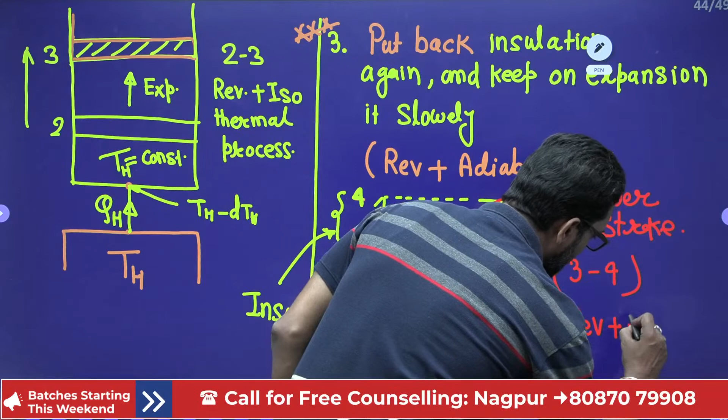So this is process 3 to 4. Process 3 to 4 is reversible plus adiabatic expansion, and this is your reversible plus isothermal expansion. You write expansion, process expansion. So this is also expansion, this is also expansion.

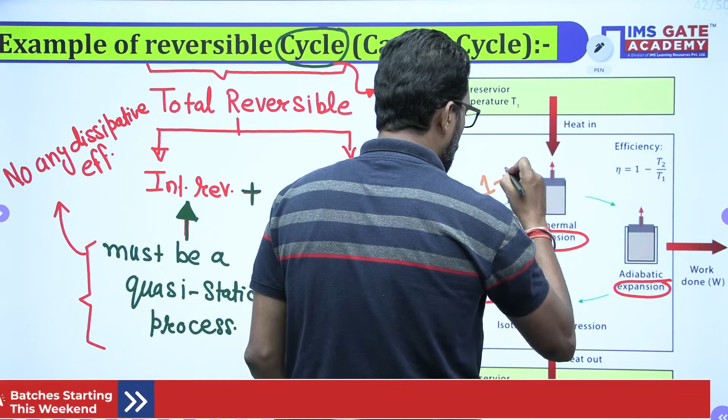Now we take process 4 to 1. This is the 4 to 1 process. Adiabatic compression 1 to 2, isothermal expansion 2 to 3, right? So there is one expansion, there is another expansion. This is adiabatic compression, 1 to 2, like that. This is your 1 to 2, this is your 2 to 3, this is your 3 to 4, and this is your 4 to 1. Yes or not?

Okay, so 1 to 2 is adiabatic compression, 2 to 3 is isothermal expansion. We add heat here, from a hot reservoir, in this sense. Now 3 to 4, there is adiabatic expansion. You already have expansion, so work comes out. Here work comes out, yes or not? This is work out.

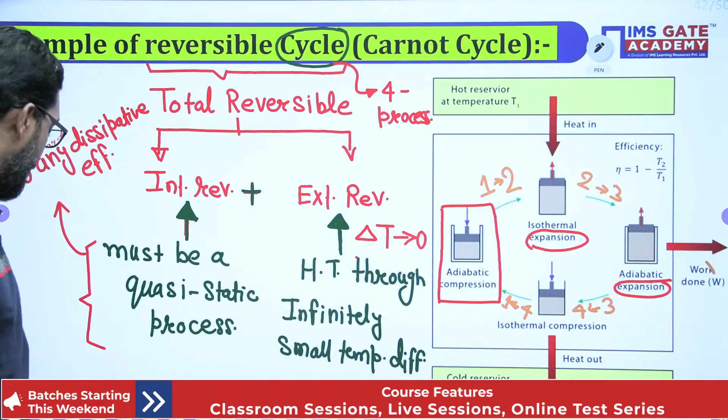Now this is a 4 to 3. Now 4 to 1, this is isothermal compression. If this is our system, for process step 4, meaning process 4 to 1, you just uninsulate and put the reservoir, compress it and transfer heat at constant temperature. That means once you compress it, its temperature will increase. Immediately, to keep temperature constant, you reject heat to a low temperature reservoir. So the temperature remains constant. So this is a reversible isothermal compression.

Okay, what we will do: if this is our piston cylinder and this is at point 4, and this is our system, and we achieve at this point, point 1. So 4 to 1, there must be a compression input. So how? The compression happens at T equal to constant. That means if you compress it, temperature will increase, but you don't want temperature to increase, so heat must be rejected.

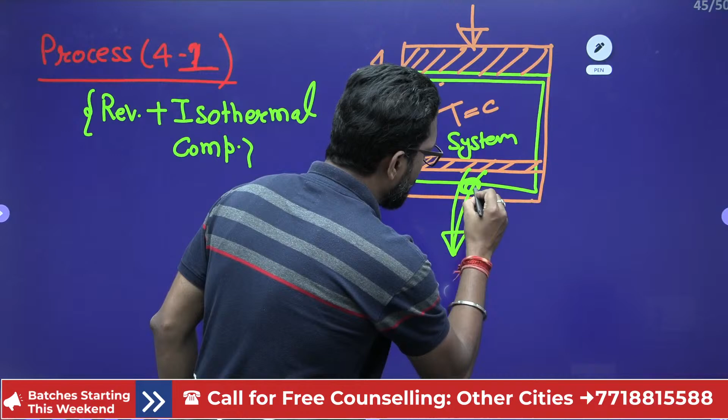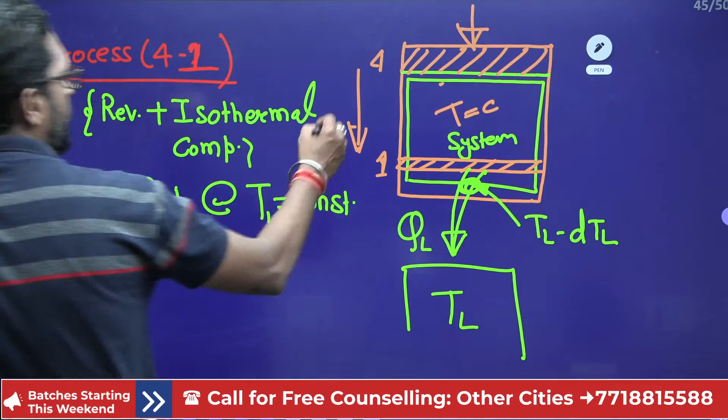Heat must be rejected, and the rejection temperature must be less than the system temperature. That means at this boundary, the system temperature is TL minus dTL, and the surrounding temperature is TL, so that heat QL will transfer. This QL is at constant temperature, and dTL tends to 0, because it is externally reversible. So the temperature remains constant, meaning heat is rejected at constant temperature TL, the lower temperature. So the cycle completes at point 1. If you draw it reversibly, this is a slow compression, 4 to 1, slow compression, so that it is internally reversible as well as externally reversible.

That means if you draw the PV diagram of this one: this is your pressure, this is your volume. Okay, this is your pressure diagram, and this is your volume diagram. So this is your pressure P, and this is your volume V.

Now, step number first is what? Reversible adiabatic compression. If you apply the first law of thermodynamics: Q1-2 equals U2 minus U1 plus W1-2. In this sense, since the compression is reversible adiabatic, this is 0. That means work 1-2 equals minus delta U. That means this is a work input. So if you compress, pressure will increase, volume will decrease, so it looks like that.

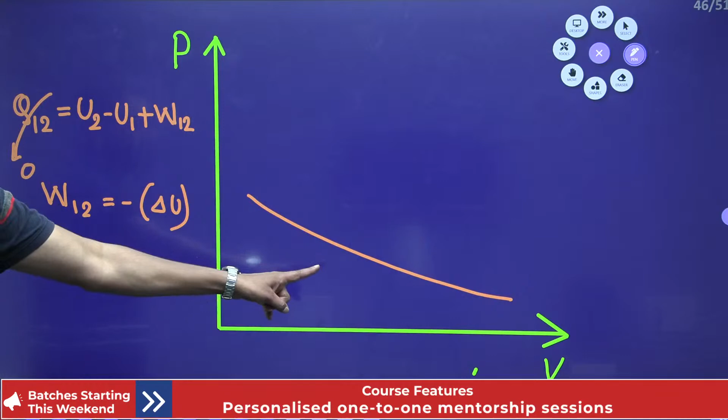This is your isothermal compression. In this condition, the temperature is constant. This is T.

This is your TL. That's not required, let's erase this one, no problem. But it should look like this, beta.

Starting from here, 1 to 2. This is 1 to 2. Start compression, so this is reversible adiabatic. This is 1 to 2.

It is not a constant temperature. Let's suppose this is 1 to 2. So this is the adiabatic compression, 1 to 2. What is 1 to 2?

Adiabatic compression. What is 2 to 3? Reversible isothermal heat addition. If heat is added, there must be high temperature. That means addition of heat from high temperature. So there must be an expansion.

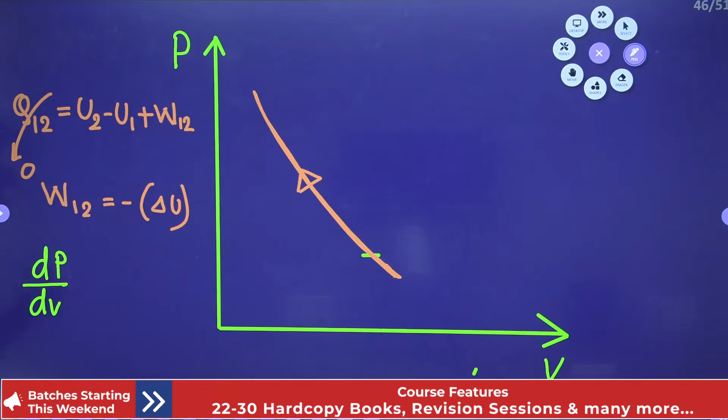dP by dV, the slope is higher for the adiabatic. At adiabatic it is gamma times the slope of dP by dV of isothermal, dP by dV at temperature constant. So adiabatic slope is higher as compared to isothermal.

If you write adiabatic and isothermal, this is gamma times. Now this is your adiabatic compression, and this is your isothermal.

This is your isothermal expansion. This is the expansion, yes? So this is point 2. Now there is an adiabatic expansion. This is a compression, isothermal expansion, again expansion.

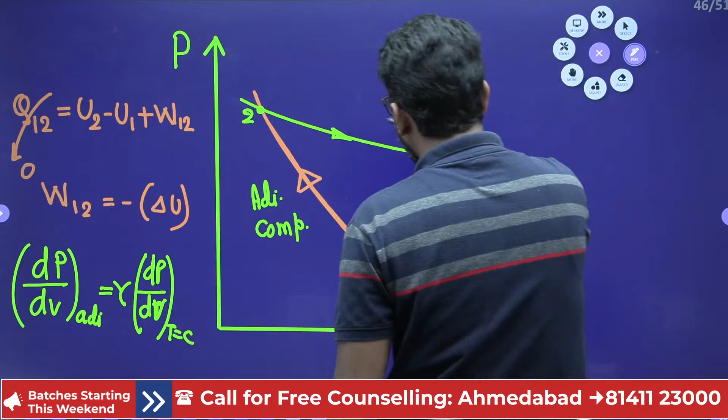This is again isothermal expansion. This is adiabatic compression, this is isothermal expansion. So this is point 2, this is 3. Now again there is a compression, isothermal expansion, again adiabatic expansion, again there is a compression — isothermal compression, 4 to 1.

Isothermal, so it looks like that. We'll draw this — this is very important, so I will discuss it here. This is the arrow, put like that. The slope of this line and this line is same.

So this is like that. This is point 4 and this is 5 — remove this one, no problem. Yeah, 4 and this is 1. Not this, this is 1. So this looks like that.

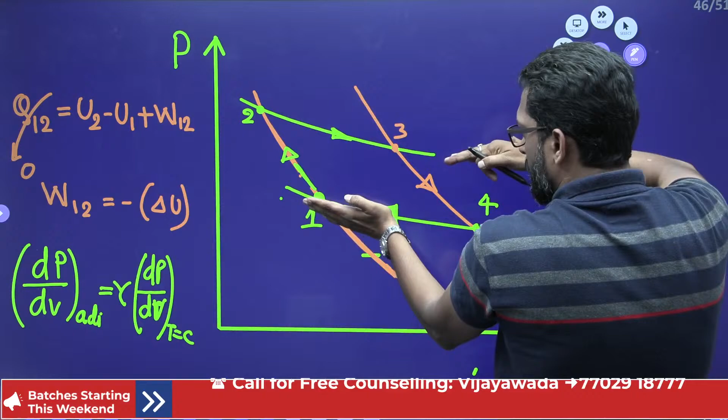So 1 to 2 compression, expansion — compression and expansion have the same slope. This is the adiabatic. Isothermal compression, isothermal expansion. So this is your TH, high temperature, and this is your TL, low temperature.

Right? These two lines are reversible adiabatic. These two lines are reversible adiabatic — reversible plus adiabatic. And these two lines are reversible plus isothermal.

And this gives a clockwise rotation, that means this is net work. What is the area in this one? What is the area in this one? That area gives the net work, that gives the W net out.

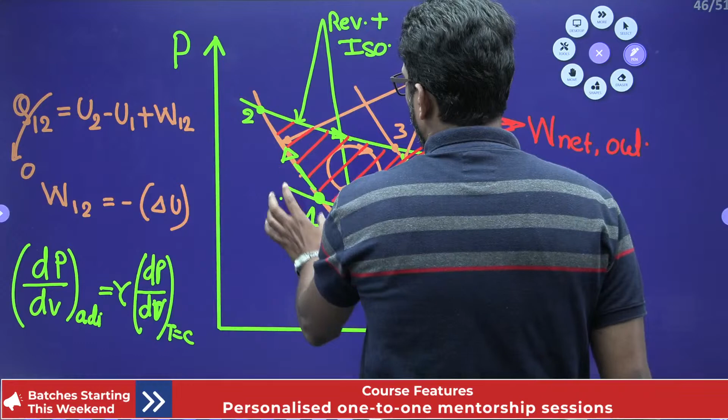So 1 to 2 reversible adiabatic compression, 2 to 3 reversible isothermal expansion, 3 to 4 reversible adiabatic expansion, 4 to 1 isothermal compression. So there are two compressions and two expansions — one compression is isothermal, one is adiabatic, and one expansion is isothermal, the other is adiabatic.

Now we will discuss these things in detail in the next upcoming chapter, and we will calculate the TS diagram on the entropy diagram once we start the entropy principle. Up to that, thank you, bye bye.